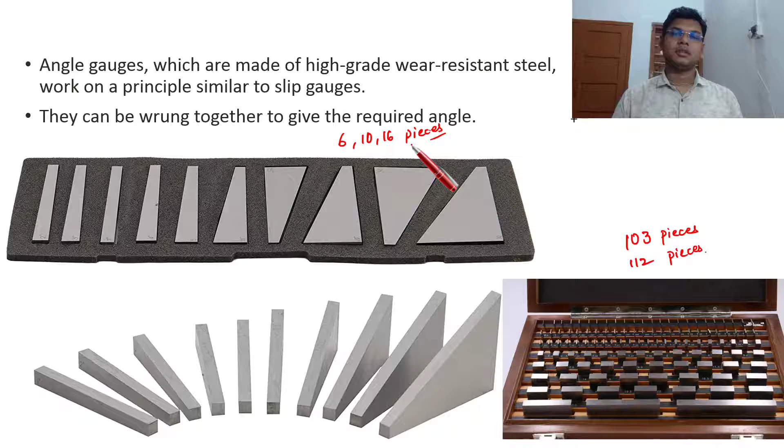So why is it so? What is the possibility here? You can see that the set of 16 angle gauges form all the angles between 0 degree to 99 degree in 1 second steps. So total how many combinations? 3,56,400 combinations. So how is it possible that with 16 gauges only you can build up these many combinations?

How is it possible? Because the angle gauges have a beauty, that they can be joined or added or subtracted from any angle. Like you see here, there is a block, this block is of 30 degree angle, and I have taken another block of 5 degree. So when we are joining together, or wrung together, after wringing, we are getting how much? Total 35 degree.

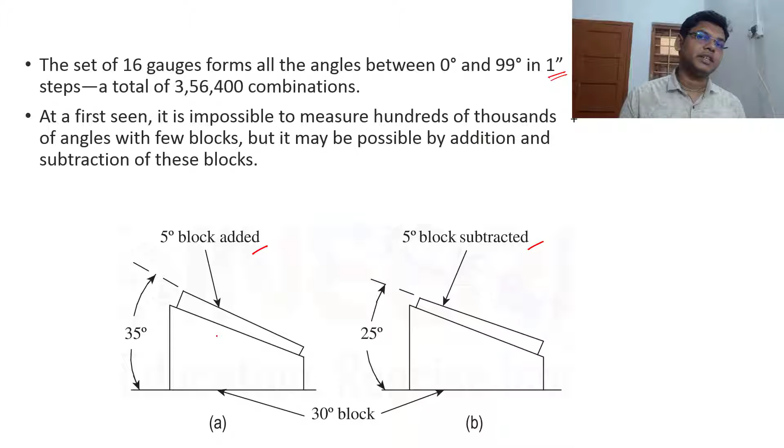But if this 5 degree block is joined in opposite direction - see, they have a bigger edge and a smaller edge, so if the bigger edge and smaller edge are interchanged, the angle will also be changed. So here it is addition, and here it is subtraction, so here you are getting 25 degree. So with the same two blocks, you are getting two angles. That is one of the advantages - with 16 gauges itself you can create a number of combinations, which is not possible in case of slip gauges.

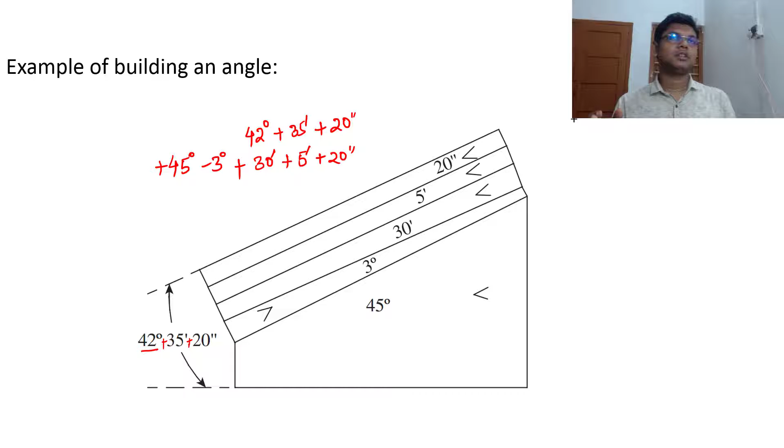So this is how the angle is built. Any angle from 1 degree to 99 degree you can build with the help of the 16 gauges set. Correct?

They are available in 6, 11 and 16 numbers. In 16 we have 6 blocks of 1 degree, 3 degree, 5 degree, 15 degree, 30 degree and 45 degree maximum, and 5 blocks of 1 minute, 3 minutes, 5 minutes, 20 minutes and 30 minutes. Then similarly 5 blocks of this one.

So you need not remember these. If you remember, that is well and good, but if you don't remember, there is no problem. Now can you say how much total angle you can measure?

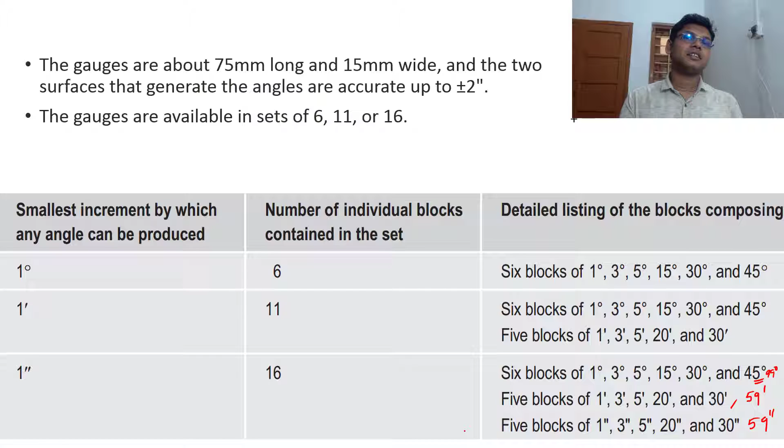So 45 plus 30 is 75, plus 15 is 90, plus 5 is 95, plus... this is 99. Here you have 30, 20, 50, and this is 59 minutes, and this is also 59 seconds. Means 99 degree, 59 minutes, 59 seconds. It is not completely 100 degree, it's 99 degree, 59 minutes and 59 seconds.

And they have the accuracy of plus minus 2 seconds. You can get an accuracy of plus minus 2 seconds.

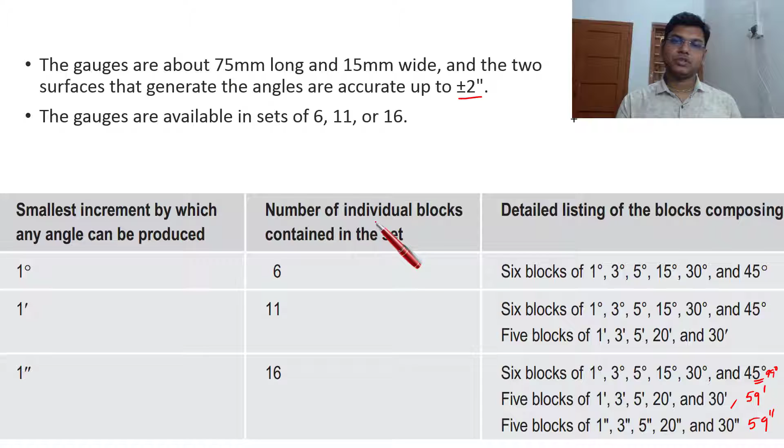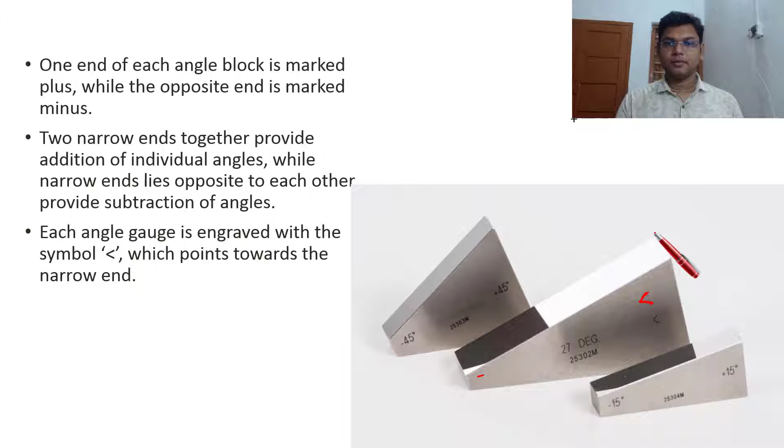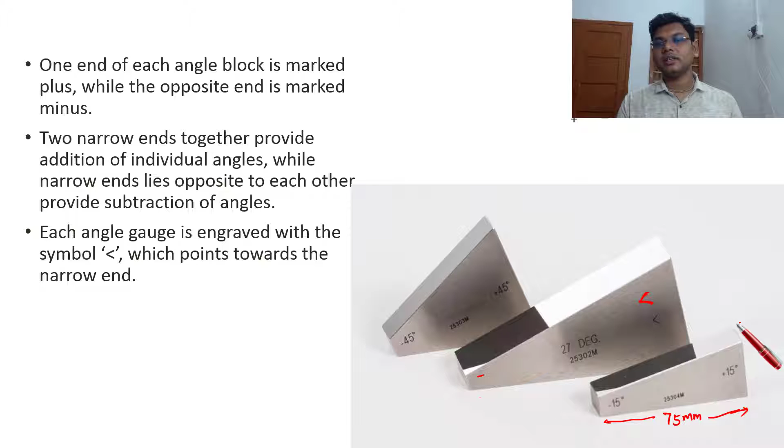Their dimensions are 75 mm long but 15 mm wide, as you can see here. So the length of these blocks are 75 mm. The total length, as we can see from the base itself, it is 75 mm. Generally it may be smaller or bigger, and the thickness is 15 mm.

So now we will see what are the advantages. First of all we will see, then we will build different angles with the help of these slip gauges, angle gauges. So what are the applications?

First of all, the application is quick measurement of angles between two surfaces in industrial engineering industries. So quick measurement is possible. It is much quicker than sine bar.

We have already studied about sine bar, right? So basically it is very difficult to use the sine bar and measure any angle. Very difficult. You have to build one by one, so it takes a lot of time. But with the help of slip angle gauges, you can do this measurement very fast.

And it will be much more accurate also. So frequent use of angle gauges is to check whether the component is within its angle tolerance or not.

Tolerance, what is the meaning of tolerance? So whenever any object is prepared, if we are preparing an angle of 20 degree, there must be some tolerance given, which is plus minus 1 degree. That means it can vary from 19 degree to 21 degree. In between this it is acceptable. So this is known as tolerance.

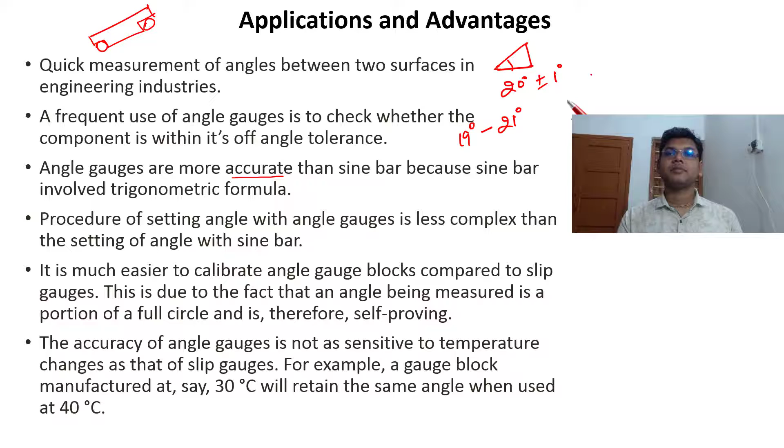Why? Because sine bar uses trigonometric formula, and trigonometric formula is not completely accurate. How can I say it is not completely accurate? Because you see, trigonometric formula involves the circle. If you see the circle...

What is the value of pi? Pi is 3.14, something like that. So this value itself is not a definite value, right? It's not a definite value, and that's why the accuracy is affected. That's why angle gauges are more accurate.

Angle gauges are more accurate. Obviously it is also less complex.

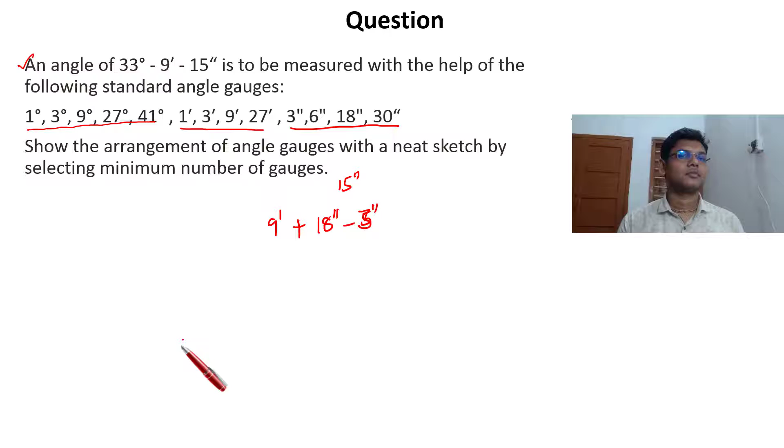After that we have 33 degree. Can we build from here? 27 plus 3 is 30. We require 6 degree, right? 27 plus 6. Can we build 6 from here? Yes, 9 minus 3 is equal to 6. So what we have to do? 27 plus 9 and minus 3. So this will give you 33 degree. So how much easy it is.

Now it is asking, show the arrangement of the angle gauges. So let's suppose this is 27, this is 27 degree, and the direction you have to show in this way. Then 9 degree, okay, this is 9 degree. After that we have 3 degree. Oh, 3 degree is in opposite direction, correct? So this is 3 degree and opposite direction. So you have to show like this.

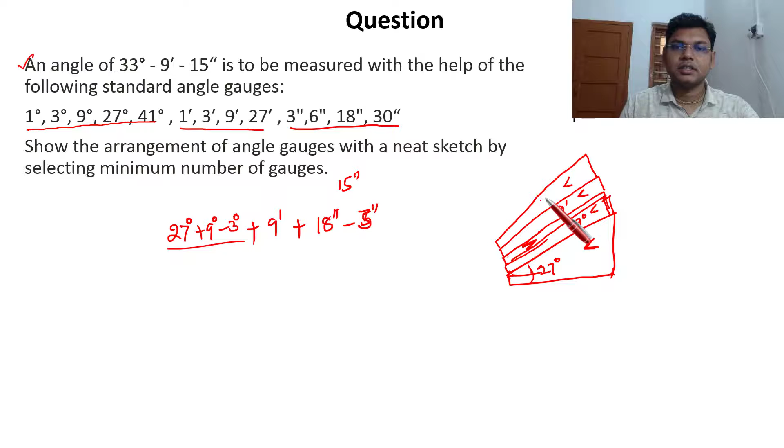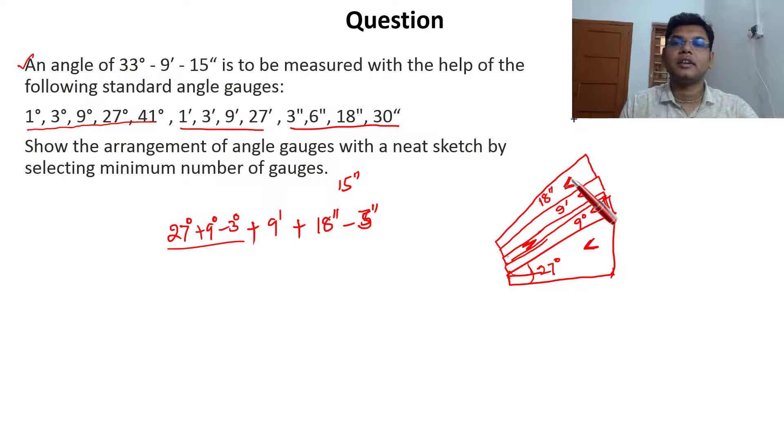After that we have 9 minutes. This is 9 minute, and in this direction only. 18 seconds, same direction. This is 18 seconds. Don't go on the size of the blocks, it's just an indication. Only this marking is very, very important, the marking of this direction, in which direction you are putting. 3 second is in the opposite direction, so this is in opposite direction, and which is 3 seconds.

So this is the complete arrangement. It is now giving you the value which we are getting. This angle is basically 33 degree, 9 minutes, 15 seconds. So this is how the arrangement is done.

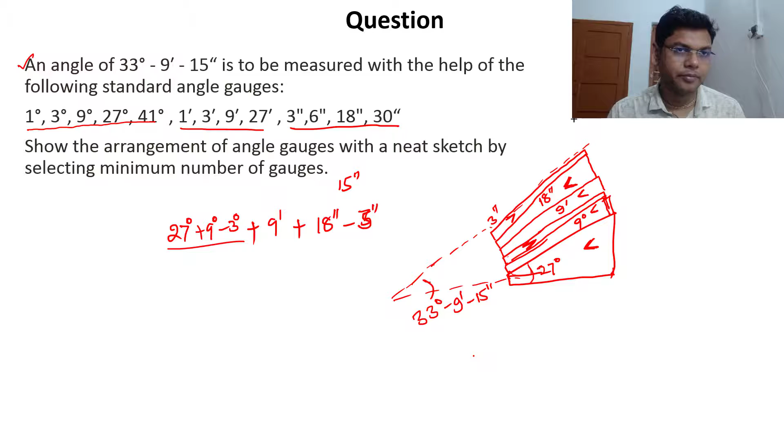Now, it is much easier to calibrate angle gauge blocks as compared to slip gauges. Calibration is much easier, because they can be compared among themselves. How? If we use 30 degree, 30 degree, 30 degree, that must give 90 degree, and 90 plus 90 plus 90, all the 90s, that will give 360 degree. So they must form a circle. If we are using this, 90, 90, 90 and 90, if they are forming a complete circle with no gap in between, that means they are fine, there is no need of calibration. But if they are not forming a circle, there is some kind of gap. That means they are having some error, and that has to be calibrated, that has to be defined, how much error is there.

So this is how the calibration is done. And there is another advantage, that the accuracy of angle gauges is not as sensitive to temperature changes as that of slip gauges. Why? Because when the temperature increases, let's suppose we are using a 30 degree angle, that will remain the same at 30 degrees Celsius, and it will remain exactly the same at 40 degrees Celsius. Whenever something expands, the angle is not going to change. This angle is not going to change. So there is nothing to worry about how much the temperature is changing. It is very, very less sensitive to temperature than slip gauges. So this is about angle gauges.

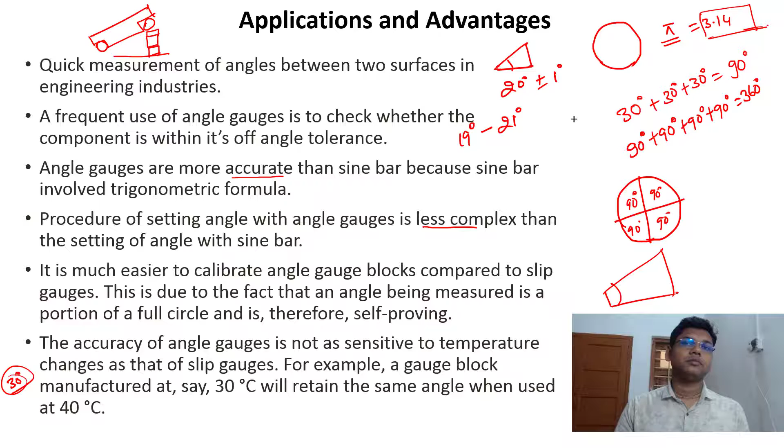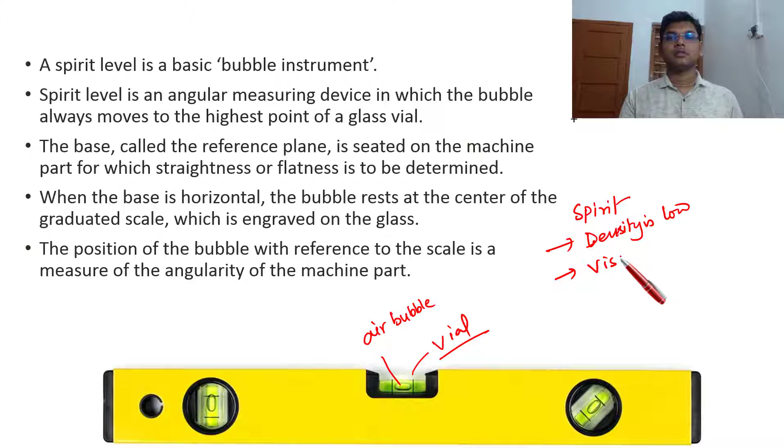So very less density, viscosity is very low. So it is very sensitive.

If something is more viscous, some liquid, then it cannot change for a small change. Like the bubble there, if you added mercury inside, filled with mercury and there is a bubble inside, now if there is a 1 degree change, the mercury bubble will not move. Why? Because the viscosity of mercury is very, very high.

So that's why we use a liquid which is of very, very less viscosity, so that it becomes very sensitive to even a small change in the angle. As soon as there will be a small change, even less than 1 degree, let's suppose 1 minute also, then it can detect the fluctuation, or you can say it can detect the angle.

Correct, so that's why spirit is used. And another important thing is that it does not have adhesive property with the glass which is used here. So it does not adhere, it does not stick to the glass, so that is one very important property. That's why water is not used, because water has this adhesive property with the glass, but spirit does not have it. So that's why spirit is used.

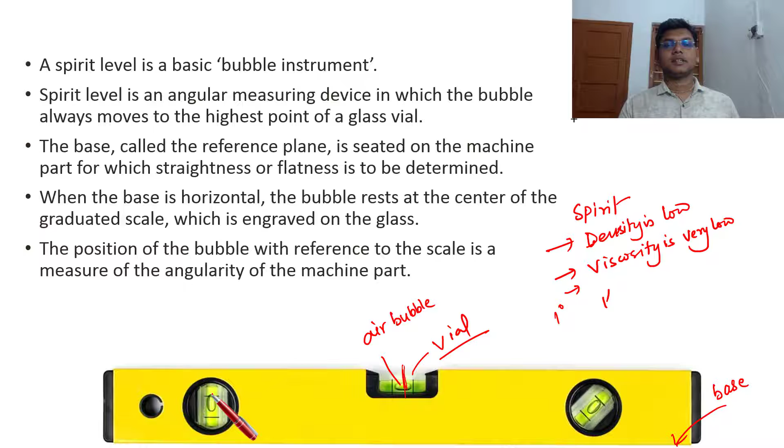Now look at here, this is another spirit level, or you can say another indicator. This is basically used for checking if there is any inclination in this direction or not. Are you getting it or not?

So let's suppose this is an object and we are going to measure. So we have kept this spirit level here, and here is that indicator, this one, the center one. But there is another indicator in this direction also. What is the purpose of this indicator? It is to check if there is any inclination in this direction or not. This one will check the inclination in this direction, and this one will check the inclination in this direction. And there is another one which is at 45 degree. Look at here, this is at 45 degree, and this also checks the inclination in this direction.

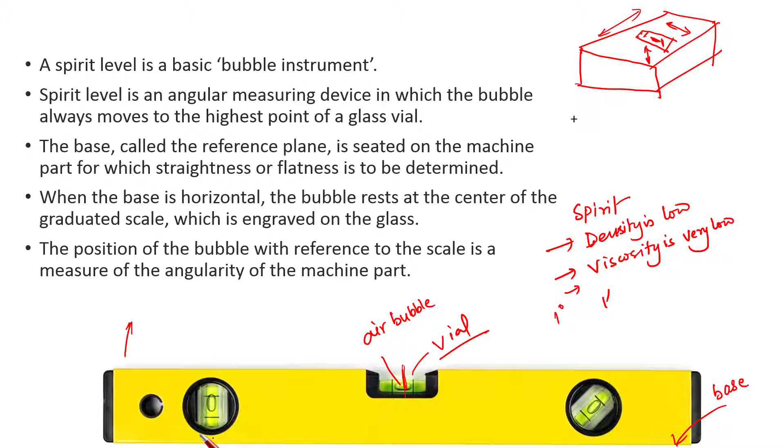In some cases it is not also available, so there is nothing to worry about. And this one is used for, this is a screw adjustment. This is a screw adjustment.

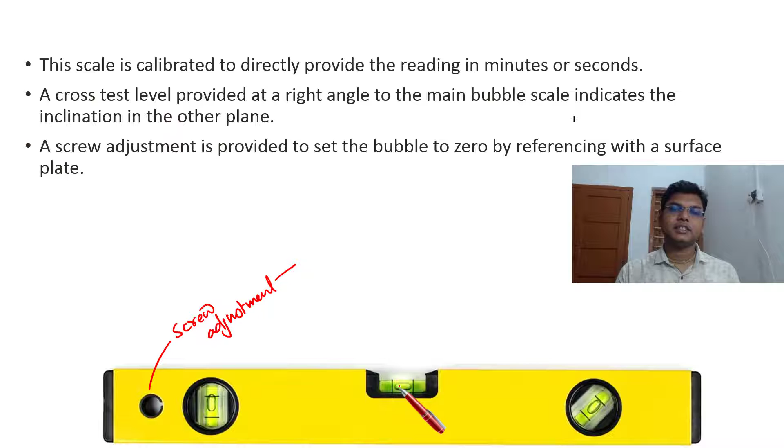To set the bubble to 0 by referencing with a surface plate. Sometimes referencing is required, so we put it on the surface plate which is completely horizontal. Surface plate we have studied. So on the surface plate we put it here, and after that we check if it is in the center. If it is not there, then by adjusting this screw we can make it in the center. So this is how the spirit level works.

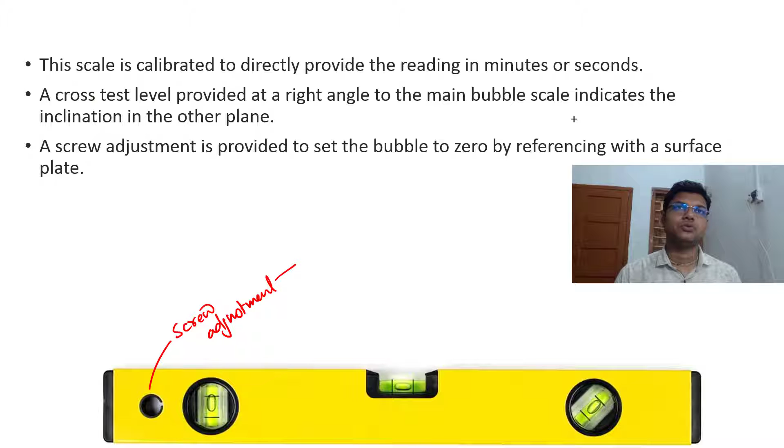Now there is another topic which is clinometer, another instrument. It also works as a spirit level, but it can measure bigger angles, because a spirit level can only measure very small angle, very small deviation, 1 degree or maximum 2-3 degree, that's all. But if we need to measure a bigger angle, then what to do? So for that clinometer is used. So clinometer is an advanced version of spirit level.

Look at here, this is a spirit level. Here also we use the spirit level, but how are we using it for measuring bigger angles? See, there is a scale, 360 degree scale. This is the angle scale, correct? And any object, let's suppose I need to measure this angle. Clear? So what I will do, this base is there, so that base will be kept over here.

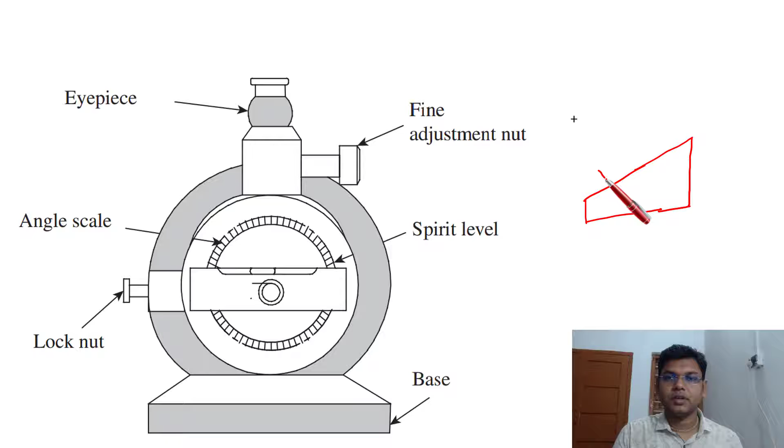As soon as you have kept the base, what will happen? The whole frame... this is outer frame and this is inner frame. With the outer frame, this spirit level is fixed, and there is another frame, that is the angle frame.

This is 0 degree, this is 90, this side is also 90, and here is 0, something like that. Now there is a spirit level, and this spirit level is fixed from back with a bigger frame, which is going like this. And on this scale there is an eyepiece which is used to see this spirit, the bubble.

So now how to measure it? Look at here what is happening. As soon as it is inclined, this spirit level is also inclined. So when it is inclined, where will be the bubble? Bubble will be at the end, this side. Here it will not be in the center. So we have to bring it in the center.

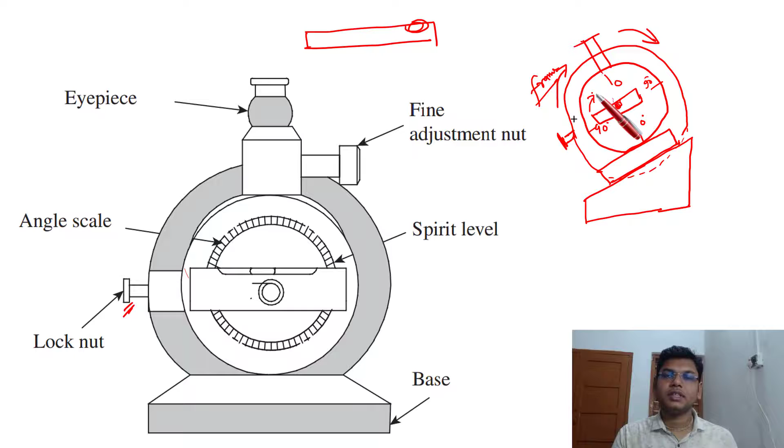Rotate it in this direction. Then this spirit level will move in this direction. And as soon as it moves in this direction, the bubble will start moving too. After some time, it will come in the center. This is the marking, and the bubble has come completely aligned with the center.

And how to check it? With the help of eyepiece, we can check that it is in complete center or not. Once it is in complete center, obviously you look here, this will be showing you the angle.

How much is the angle? Earlier it was set at 90 degree. This is parallel to 90 degree, but when it is rotated, it will come somewhere here. Are you getting it or not? So this will be 90 degree, and after some time it will come to, let's suppose, 70 degree. So can we tell what it is? How much is the inclination of this one? This is 20 degree. So this is how this clinometer works.

The actual point is that this is not going to move. The angle does not move. Basically, we can move this one. So when it is moved, then automatically, see, because it is inclined, 90 will reach here. 90 will come here when it is inclined. When it is horizontal, then 90 will be here. When it is inclined, then 90 will go here.

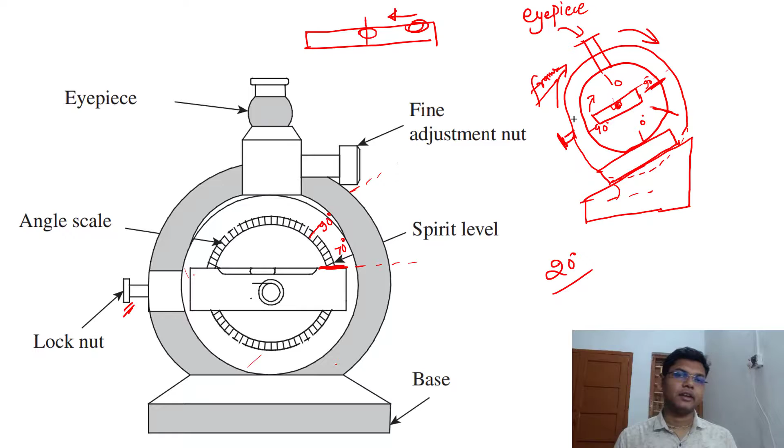Clear? So this is how it is going to happen. We can check and measure any angle. So these are all explanations of it. This is having an accuracy of 1 minute, and there are electronic clinometers.

They have a sensitivity of 1 second. Also we can make it. Basically it has the same purpose as the spirit level, used to determine the straightness and flatness of any surface. So as the spirit level works, that is what is the use of clinometer.

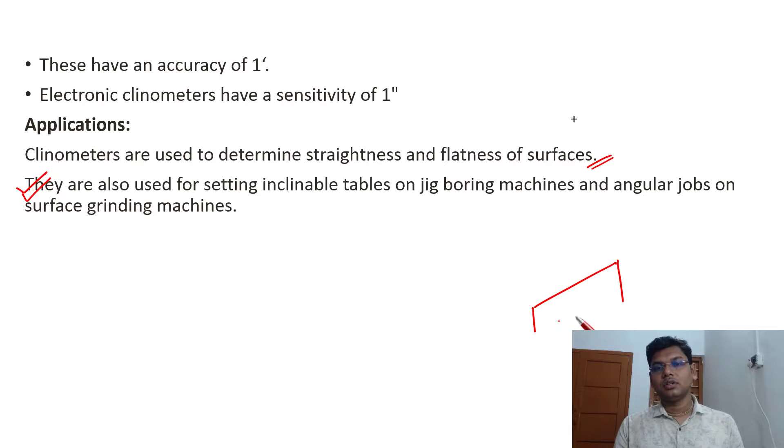But there is a special use of clinometer, that they are used for setting inclinable table on jig boring. Let's suppose that I need to make a hole here, at an angle, let's say 60 degree, and we want to drill it in this direction. So how to drill in this direction? For that purpose, we have to set the table at 60 degree.

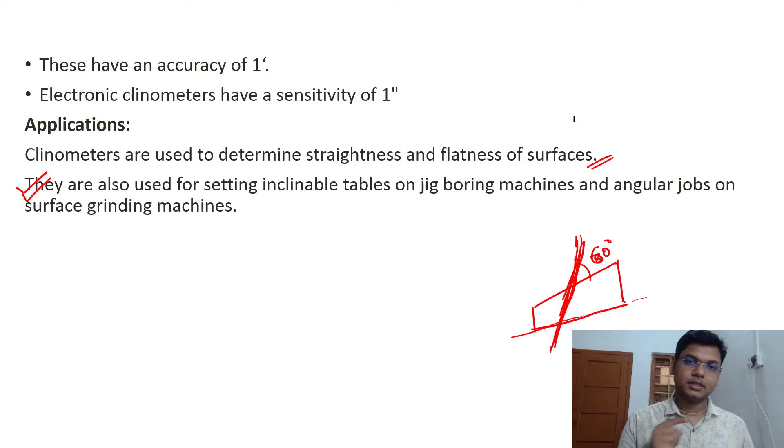So how to check that it is at 60 degree? With the help of clinometer, we can ensure that the table is set at 60 degree. Now we can do the drilling operation. Right? So that is the use of this clinometer.